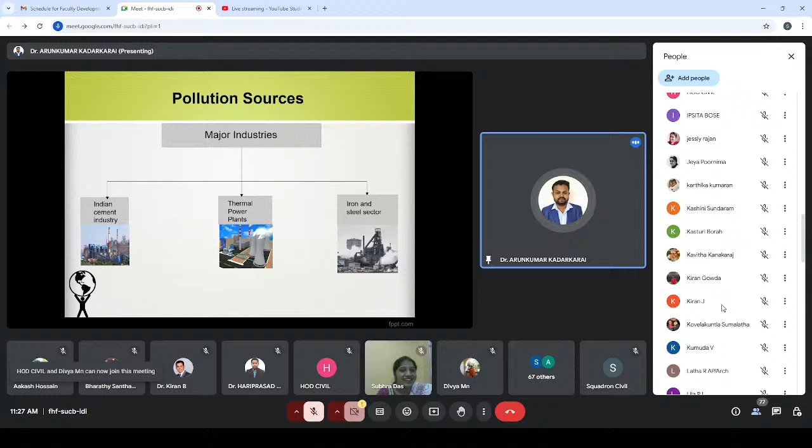And again, the iron and steel sector - that is the most important industry creating the most pollution, because to create iron itself we have to heat the ore and extract the iron. So there is more emission of CO2.

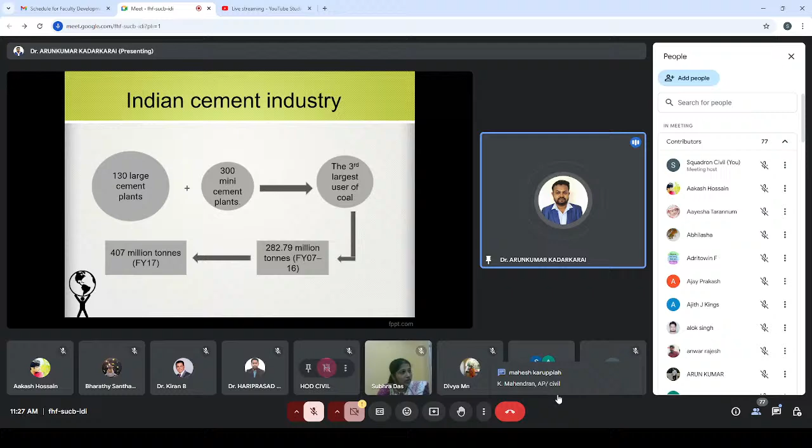First we have to look at the scenario of the Indian cement industry. Around 130 large cement plants are there in India, and 300 mini cement plants. We are the third largest user of coal - coal is the fuel required to produce cement. This is the data we are using.

This data is taken from around 2016, so I'm talking about a decade back. Now we are reaching 2025. Ten years back, 282.79 million tons of coal was used, and in 2017 alone it increased to 407 million tons.

Now think about how much coal we are using, because cement is the most important thing needed for construction. We are using it more widely, and there is increasing usage and requirement of cement, so we have to produce cement according to what we need - that much we have to produce. So obviously there will be usage of coal.

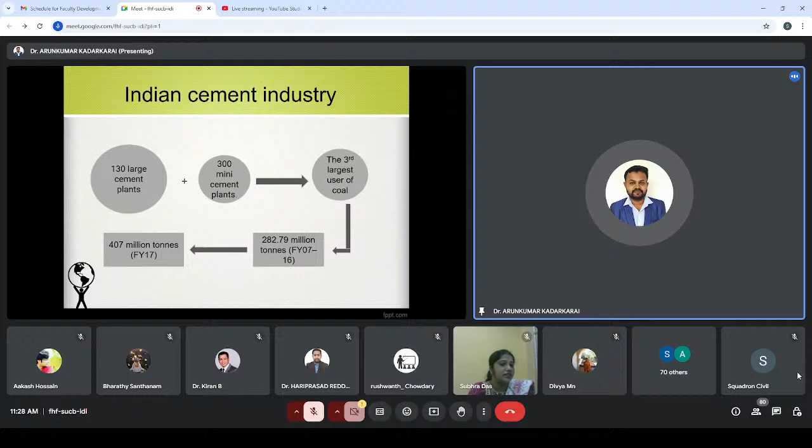There will be usage which means creation of pollution to the environment. In the cement industry, what we are using as material for production of cement is a natural resource—limestone and other raw materials taken from nature. In return, we give back to nature 0.87 tons of CO2 and 3 kg of nitrogen oxide for the production of cement. So how do we look at it?

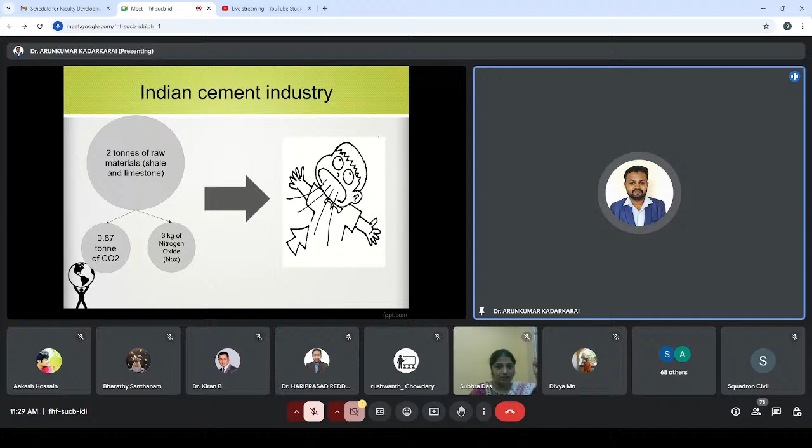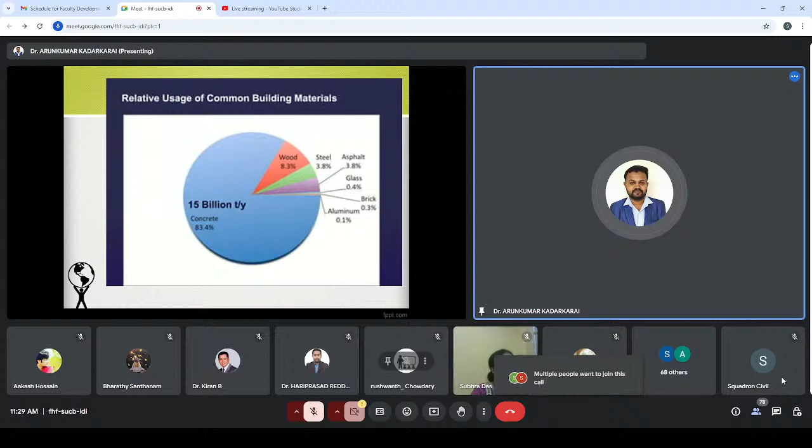What are the relative common building materials we use? From this you can understand around 15 billion tons per year of concrete is used widely among all construction materials like wood, steel, asphalt, glass, brick, and aluminium. Among these, concrete and cement are the most widely used materials in the construction industry.

This is a pictorial representation for your better understanding: concrete versus cement. How much cement is used in concrete? 11% of cement is used in 1 meter cube of concrete. And in that cement, how much clinker and how much other substitutions are there? Around 78% of clinker is there in that 1 meter cube of cement.

In the clinker, how much is raw material and how much is limestone? Clinker, as we all know, is produced by burning limestone. So in that, 80% of limestone is used. Think of it—in the concrete only 11% is cement, and in that 11%, we are using 80% limestone.

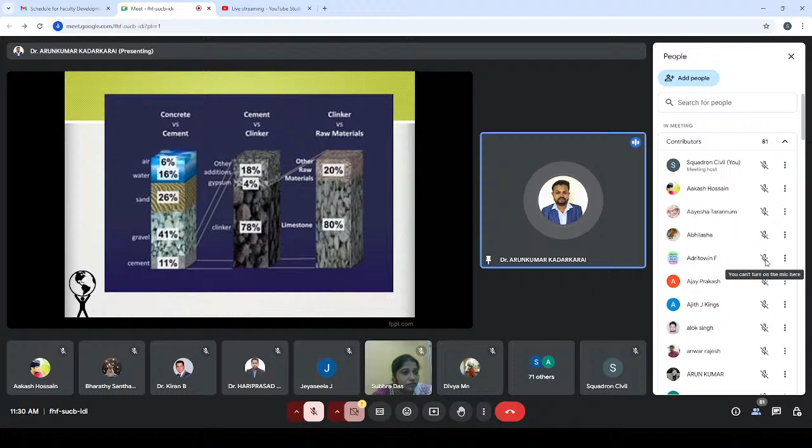Coming to gravel and sand, that is also a natural resource we are using. Water is nature, air is nature—everything we are taking from nature. But what we give back to nature is pollution. So this is the CO2 emission in cement industries and cement manufacture.

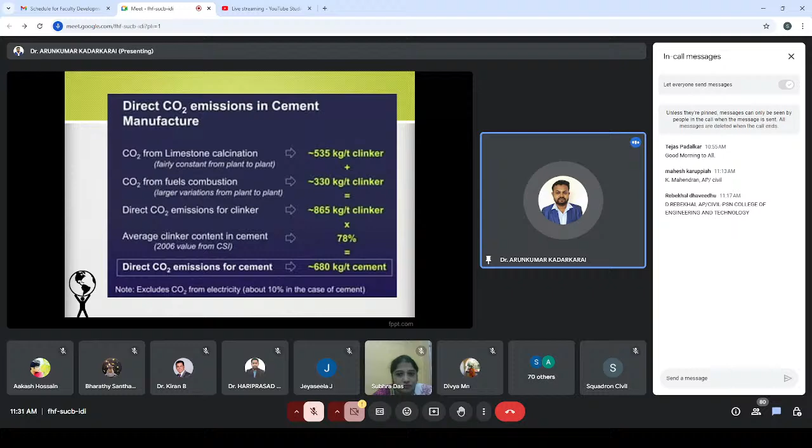For limestone calcination, it takes 535 kg per ton of clinker, and CO2 from fuels alone is 330 kg per ton of clinker. Direct CO2 emission from clinker is 865 kg per ton of clinker. So totally, an average of 78% is what we looked at.

Calculating that 78%, we come around 680 kg per ton of cement, which is needed while producing 1 ton of cement. So for the production of 1 ton of cement, we are producing around 680 kg of CO2.

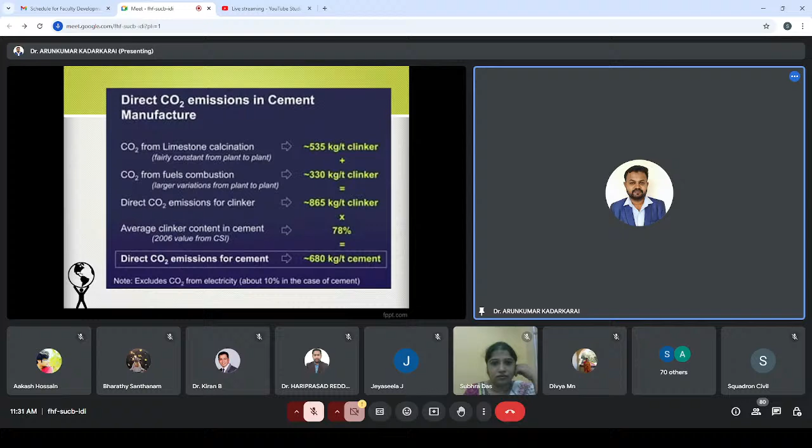So next, what is the main lever we look at to reduce CO2 emission?

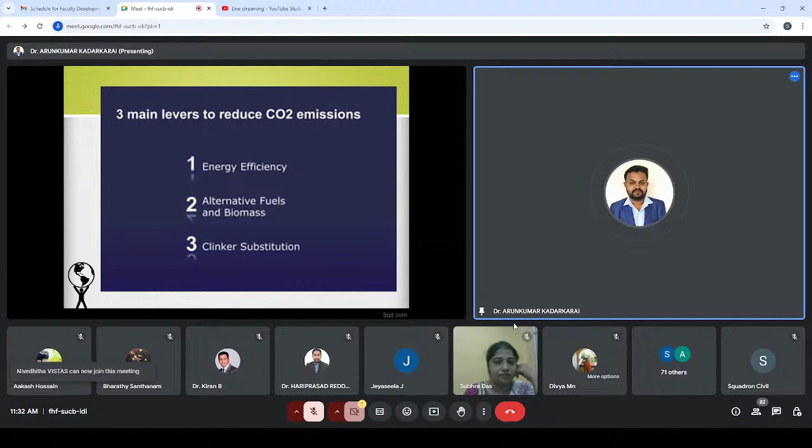First, we have to go for energy efficiency. Again, we have to move to alternate fuels, or go for clinker substitution, or else replace the cement utilization in concrete. This is what we can produce.

Again, this is another waste material which we produce in large amounts—thermal power plants. This is the most common term used for generation of power. We have more systems for power generation, but obviously this is the most important, most efficient, and most useful one, so we use it wisely.

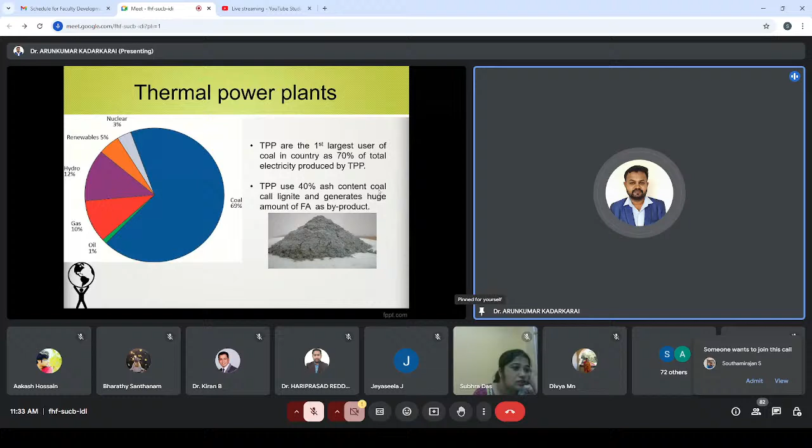Thermal power plants are the largest user of coal in industry. 70% of total electricity in the world is produced using thermal power plants alone. In that, 40% of ash is produced from generation of power—waste produced from power generation. So in cement we use 78% clinker, and here we use 40% fly ash, which is produced as waste.

In the iron and steel industry—the second largest coal user in industry—we produce waste as a byproduct, GGBS. This is one of the GGBS.

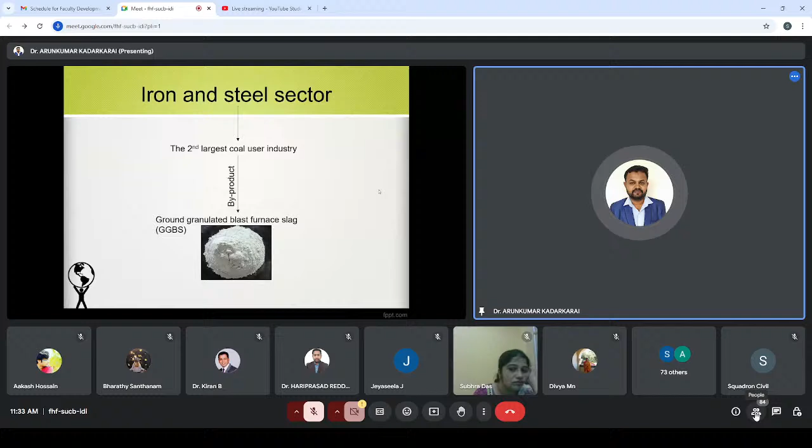Coming to this, what we use as of now as cement is a major pollutant. The major use by human beings in our world is electricity, produced using power plants. And the most consumed or useful products, steel or aluminium—from those industries also we produce waste. So everything we are depleting in nature; we are not at all doing anything environmental or eco-friendly.

So how to overcome this and how to reduce the usage of cement? For this, we have to move on to the next level, that is geopolymer concrete.

I think you know about geopolymer concrete and have heard about geopolymer. Geopolymer is nothing but alkali activated concrete, alkali activated paste, or alkali activated gel. This is nothing but a polymerization gel, an innovative material characterized by long chain networks of inorganic molecules, and a potential alternative which can replace cement.

You can compare this OPC and GPC. In OPC, we produce by adding cement with water, right?

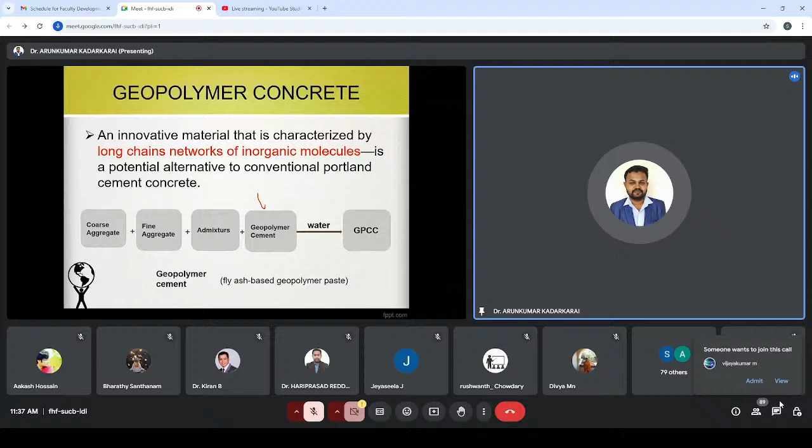Any fluidity or viscosity, if needed, you can add water. So further, you can produce GPC.

Again, what are the constituents we are using here? Coarse aggregate, fine aggregate, admixtures. If you need any increase in fluidity, viscosity, or slump of the concrete, you can use admixtures.

But obviously, unlike cement, like OPC, we don't need compulsory superplasticizer. We don't need that because in the gel structure itself, there will be some fluidity there. That is enough for a slump-based mix.

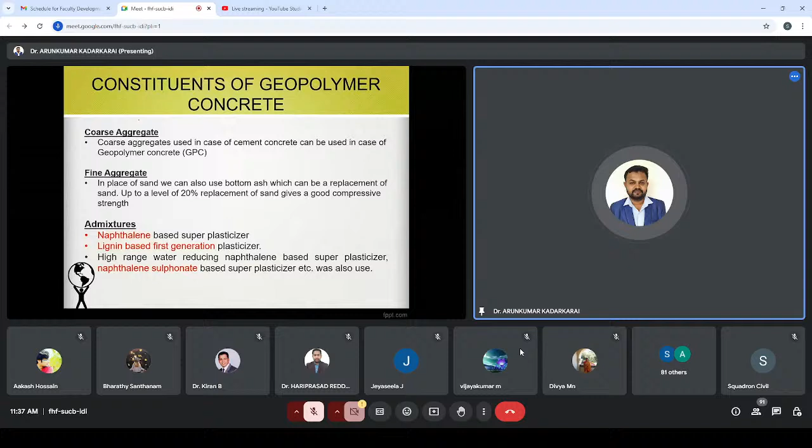In case you want to produce a self-compacting mix, at that time you have to add these water reducing admixtures or water repellent admixtures.

Coming here, this is the most important term we need to know: geopolymer. How it can be produced, how it is generated, how the polymeric chains are formed - these are the things explained here.

In the fly ash, we have SiO2 and Al2O3. I think you know what SiO2 and Al2O3 are - nothing but silicon dioxide and aluminum oxide. The material which has SiO2 and Al2O3 can be used as a binder or aluminosilicate source material.

But whichever the material, whichever the waste, whichever industrial byproduct that has silica and alumina, SiO2 and Al2O3, that can be used as binder or aluminosilicate source material in the geopolymer family.

Coming here, geopolymer is an aluminosilicate based polymer. Si and Al is the most important parameter required for the creation of the polymeric chain. So the ratio between Si and Al, for example in my fly ash-

You have to know fly ash taken from different resources, different countries or places is not the same. It does not have the same property or composition. Each one has different composition and different properties.

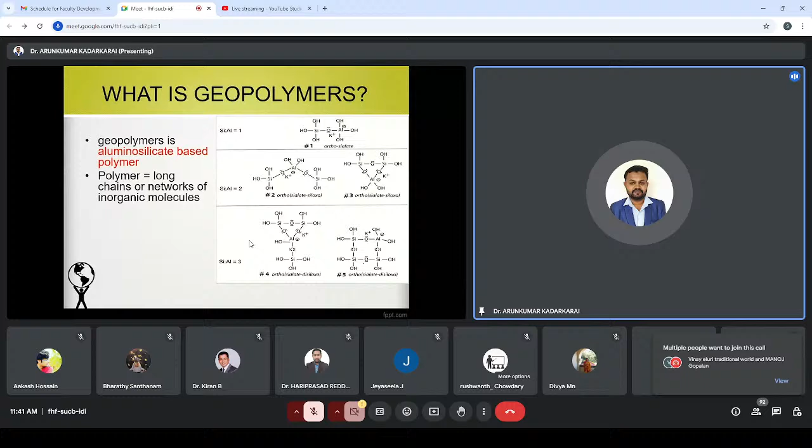Again, if my Si and Al ratio is equal to 1, this is the bond which is created inside this, that is SiOH and AlOH. If your Si and Al ratio is 2, again this can be created, that is ortho sialate siloxo. So this is one type of bond which can be created. This is the third bond created, if your Si and Al ratio is equal to 2, and if your Si Al ratio is equal to 3, this is the bond which can be created. This is number 4, and again that can be rearranged, this is formed as fifth. This is the polymeric chain which is formed in the fifth chain. So this is what is happening inside the geopolymer concrete.

And here we need to know what are the constituents of geopolymer, what are the components, and what are the ingredients which we are using in the geopolymer, how we can prepare the geopolymer, right?

First and foremost, we have to know what the source material is. As already told, it is aluminosilicate material. Aluminosilicate material is nothing but a waste byproduct which has aluminum and silica, that can be used as an aluminosilicate source material or binder.

Again, alkaline activators or alkaline liquids. This is either a combination of sodium hydroxide and sodium silicate, or potassium hydroxide and potassium silicate. Either should be both the Na terms, NaOH and Na2SiO3, or else it can be potassium hydroxide and potassium silicate. Source material rich in aluminosilicate, that is fly ash or any other binder, can be added with the alkaline liquids, that is alkaline silicates and hydroxide plus distilled water.

Why is this distilled water used? To change the hydroxide NaOH pellets into fluid form. For that we use distilled water, and one more extra water can be added to improve the fluidity of the mix. So for that also we can use distilled water. From this we can produce the geopolymer concrete.

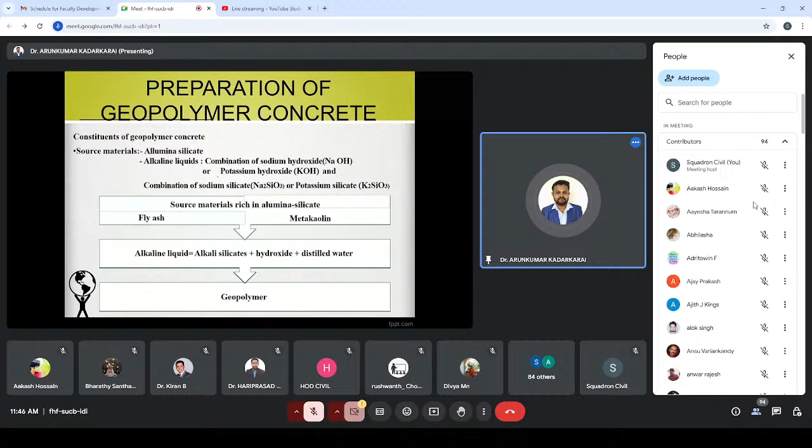So we have to look at two types of geopolymers. First is two-part, and the other is one-part. We have seen all those things, how the chains are created, right? And coming here, what are the source materials we can use, and what is the necessity of those things, right?

So aluminosilicates, whereas calcined clays, kaolinite clays, volcanic rocks, mine tailings, industrial byproducts like fly ash, silica fume, GGBS, rice husk, red mud, slag - everything will be used as an aluminosilicate source material.

Obviously, here also some of the byproducts - I can name it as rice husk, silica fume - which are rich in silica, that can be used as an alkaline activator. Research is also going on, like by using those rich silica materials as an alkaline activator, they are producing geopolymers.

Again, coming to alkaline liquids from chemical refineries, that is NaOH and KOH, and Na2CO3 and K2CO3, sodium silicate and potassium silicate. So both things mix together and polymerization happens inside and geopolymer cement is produced.

Again, this polymerization is the most important thing which needs to be looked at in geopolymer concrete. How this happens, and whether there is any requirement of temperature for this, and any requirement of controlled conditions there for creation of polymerization. That is the main question.

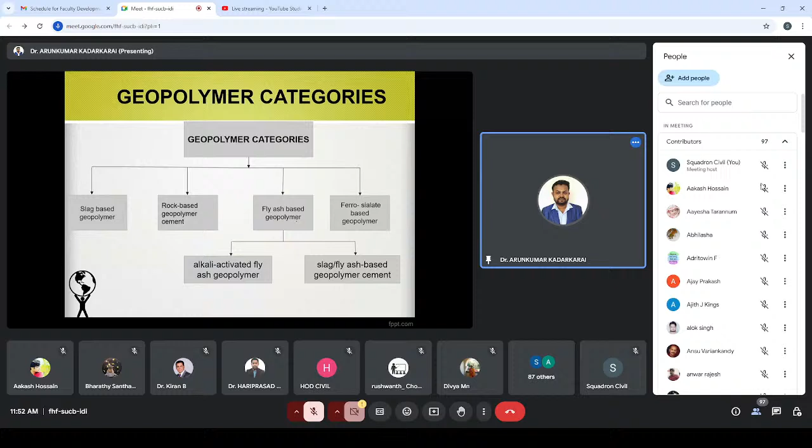In fly ash-based geopolymer, alkali activated fly ash geopolymer will be there, but we don't want to discuss much more about this. Slag-based geopolymer uses blast furnace slag, GGBS, as one of the binders, so you can call it slag-based geopolymer. And rock-based geopolymer, if you are using volcanic stuff and mine tailings, you can call it rock-based geopolymer cement.

Again, fly ash based geopolymer can use alkali activated fly ash based geopolymer. As I told you, we need elevated temperature curing, so after casting the cement we have to heat the samples for some duration to activate those materials and get the polymerization reaction.

So we can use NaOH and sodium silicate gel, and after that we get a geopolymer gel. In slag and fly ash based geopolymer, GGBS will be there, and fly ash or aluminum silicate source material will be there, along with sodium silicate and sodium hydroxide solution.

Here you can see calcium polysilicate, that is nothing but CASH, calcium aluminosilicate hydrate gel, and there's also NASH gel, sodium aluminosilicate hydrate gel. This is what is produced from slag fly ash based geopolymer, because GGBS has high calcium. So if your source material has high calcium, the reaction product will be calcium aluminosilicate hydrate gel and sodium aluminosilicate hydrate gel.

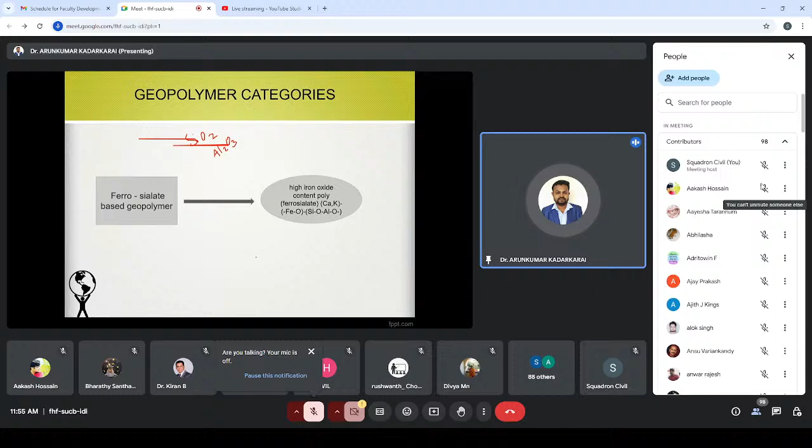It's like, there will be a ferro aluminosilicate hydrate gel formed. Obviously, we don't have that much Fe2O3 content in any source material, but the reaction product can be there. In some microstructure analysis, you can check and see some ferro-sialate based geopolymer gel is present.

Coming here, comparison between conventional plain cement concrete and geopolymer plain cement concrete: curing and strength. Conventional cement concrete requires a 28 day strength period for curing and strength gain.

You can check more literature to find comparisons of strength between these two. Geopolymer can attain its strength within 3 days, maximum, reaching its 28 day equivalent strength compared to cement.

And the setting period: conventional cement sets rapidly and retards while transporting, but here it sets slowly. In case of fly ash based mix, it sets slowly, so it can be useful for transportation.

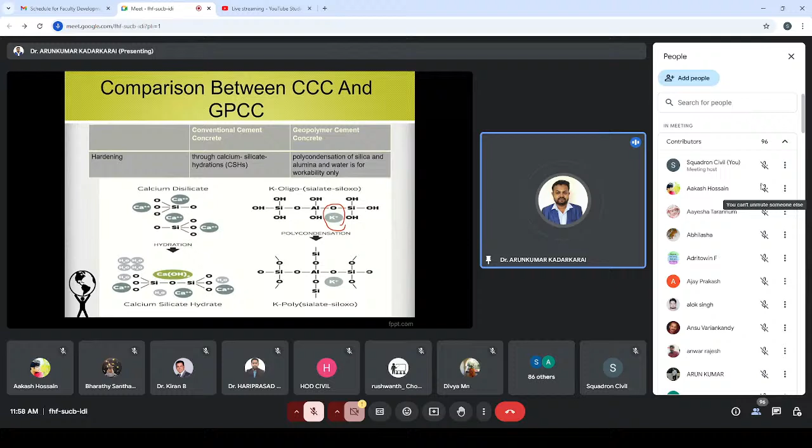Only need is this K. K is nothing but either it can be Na or K. In this they are representing using potassium. In case if it is sodium based, here it can be only sodium. That's it. So here it forms like this polycondensation. Again, it is termed as poly(sialate-siloxo), right?

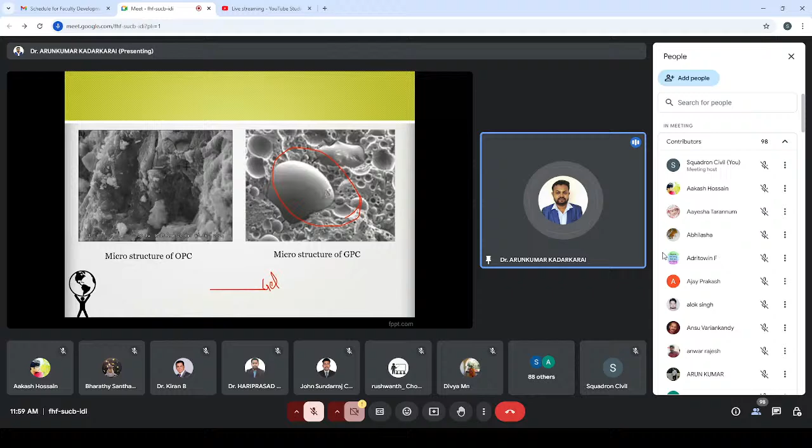Again, as a researcher, we have to concentrate on the flaws also. So in the GPC, we have a lot of flaws. I will say one by one, right? So first we will see one by one as advantages. Then we will see the research gap that we have. So again, the same thing.

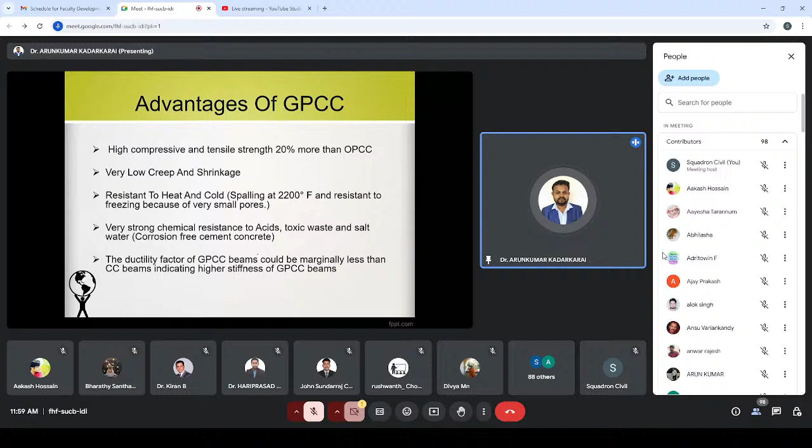Advantages are high compression and tension, low creep and shrinkage, resistance to heat and cold, very strong chemical reaction, chemical resistance, and ductility factor will be less, and stiffness will be more, right?

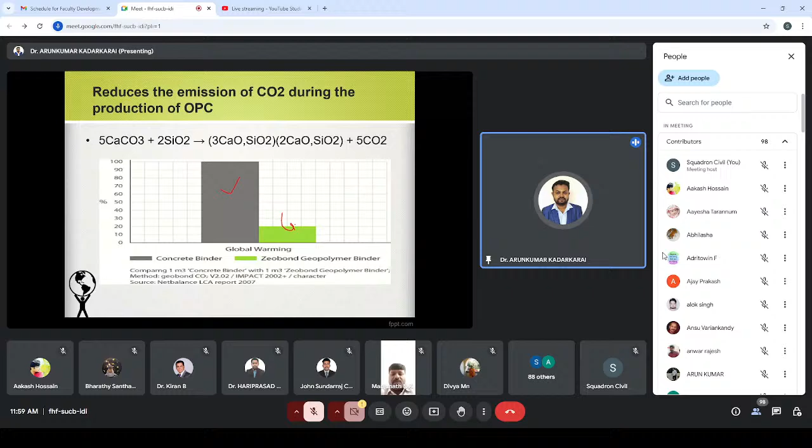So how it is reducing CO2 emission. So this is for cement and this is for GPC. So how it is reducing the CO2 emission in the environment if you are using GPC, right?

So where it is available. So already it is implemented. Geopolymer concrete is implemented already. There is a British company, Banah, which jumped up as a geopolymer cement. They already registered it as a product, and the Australian company Zeobond already created Ecrete as a geopolymer cement. The name is Ecrete, and the North American geopolymer application is blended Portland geopolymer cement, known as Pyrament. You can see, and that is patented in 1984 itself, right?

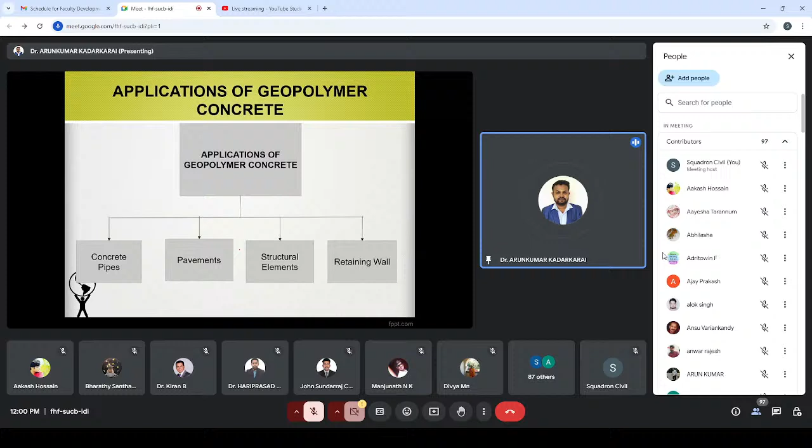So where we can apply this: concrete pipes, pavements, structural elements, retaining walls, everything everywhere we can apply. So this is the existing application where they have built an aircraft landing for aircraft takeoff, and this is using Pyrament. In the US, they have created a pavement using geopolymer cement, right?

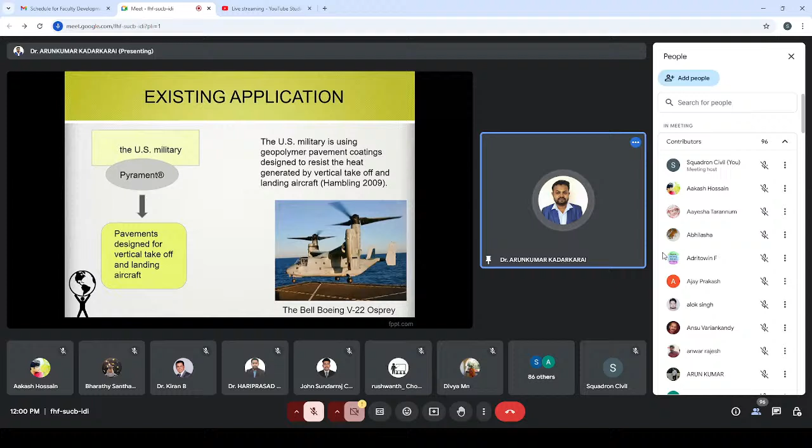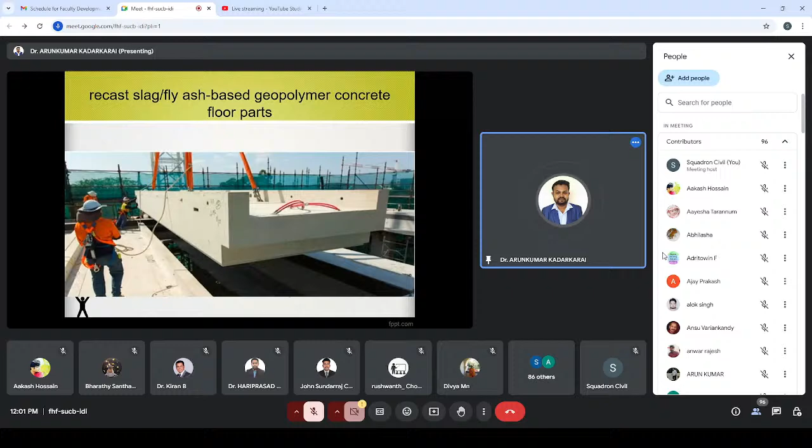So this is one university which is already created and constructed using geopolymer concrete. Queensland University, you can see and check it on the website. And this is slag fly ash-based geopolymer concrete floor parts, which is already implemented. And the greenest airport in the world, Wellcamp Airport, has more than 3,000 cubic meters of the lowest carbon, cement-free geopolymer concrete.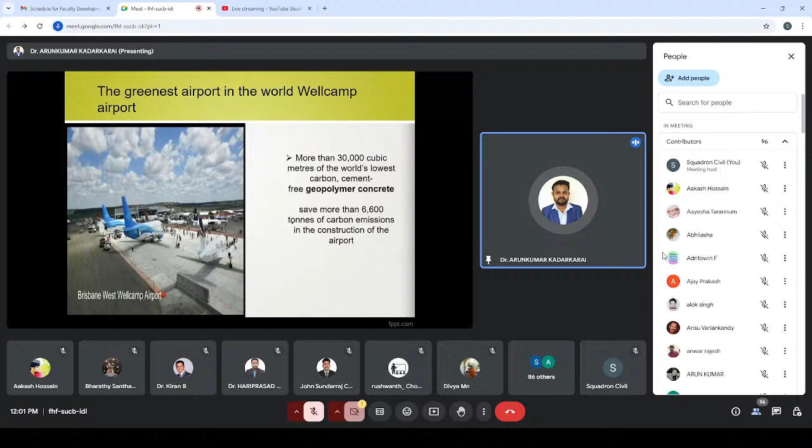And future scope of GPC, where we can use GPC, that is transportation and construction offshore applications. And again coming here, what are the problems we have in GPC and what are the solutions we can term as research aspects. Now we are getting into a discussion about this, right? So now you can get an idea about what is GPC and what are the elements in GPC, what are the ingredients, everything, what are the properties.

Obviously, it will be great performance in all these 10 characteristics compared to OPC. However, coming here, GPC is produced using chemicals. First drawback is applicability, right? So whereas in cement, we can think of the workers in a workers' mindset, that will be easily applicable, but geopolymer cannot be applicable.

Because the strength and whatever parameters we are measuring in GPC are all based on the ingredients, like the aluminosilicate source material, quantity of aluminosilicate source material, quantity of chemical composition present in that, and quantity of NaOH, how much we are using, what is the molarity of NaOH, and what is the quantity of Na2SiO3 we are using, what is the ratio between NaOH and Na2SiO3, and how much amount of water we are adding. So a lot of things are there. These are all the parameters we have to decide, and these are all the parameters which decide the strength and behavior of geopolymer, obviously. A normal worker cannot implement those things, cannot use those chemicals by these configurations, right? So we have to simplify the applicability of the geopolymer concrete.

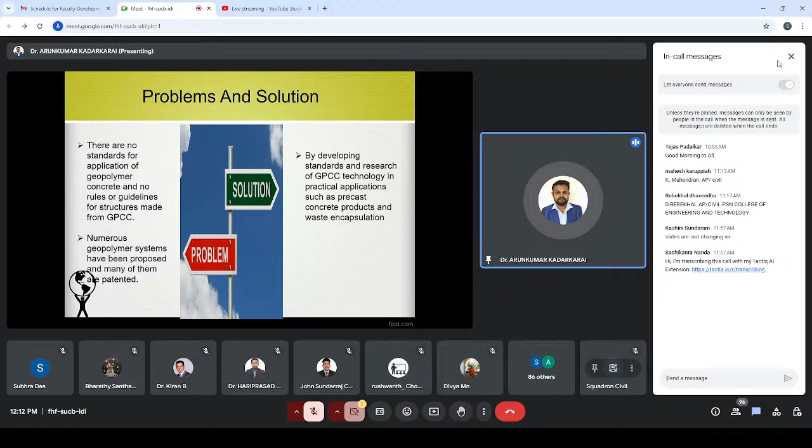Sorry, what I was saying is that one-part geopolymer is not only based on sodium silicate or sodium hydroxide or potassium silicate and potassium hydroxide. The material which is having Na or K in its composition can be used as an alkaline activator, and that is where the research is going on.

We have to look out, for example, if we are having wood ash, in wood ash we are having potassium. K2O is higher in wood ash and corn ash, but here there will be a problem, like how to get the K out of it. That is the thing we have to focus on.

There will be a lot of ways. First is calcination. If you calcinate this wood ash, the O can be removed out of that, and K2 will remain. Again, you have to react it with water, that can be termed as KOH. But these are all unproven research areas. I'm suggesting you do research on this.

We can focus on how we can take an alkaline activator from naturally available materials. That is what we have to focus on. Again, think of how many scientific papers are being published on geopolymer.

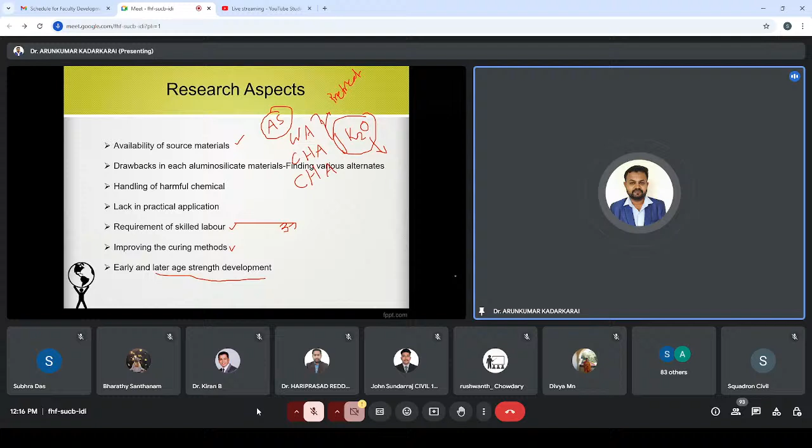So you can do this in case you need any help doing research in geopolymer concrete—you can get in touch with me, and please focus on the material side. Don't focus on the behaviors and properties. Just focus on the materials and change the materials.

Understand the basic mechanism of geopolymer, and based on that you can choose the material where we can make changes, and go in depth about the material characterization analysis, so that you can get a solution for the applicability problem. I hope I have shared whatever I know, so if you have any doubts, you can ask me.